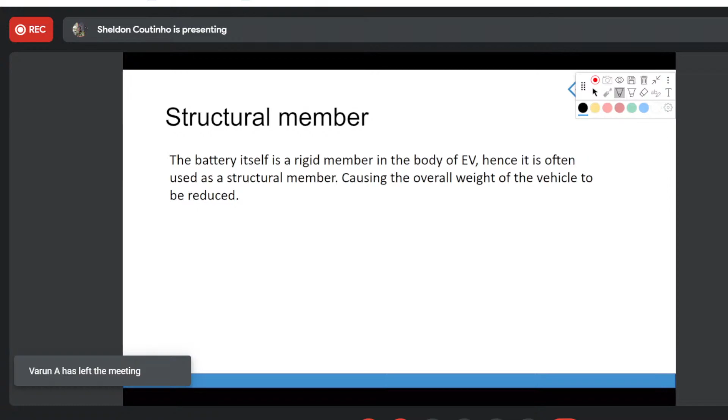So on the right, you have a traditional ladder frame chassis that we see in most modern pickups and tempos. To your left, you see the EV chassis. Now, you can see a lot of cross members running through this typical H-frame or ladder frame type chassis. These cross members are not light components - they are extremely heavy. Total, just the cross members running between the two ladders would weigh around 90 to 100 kilos.

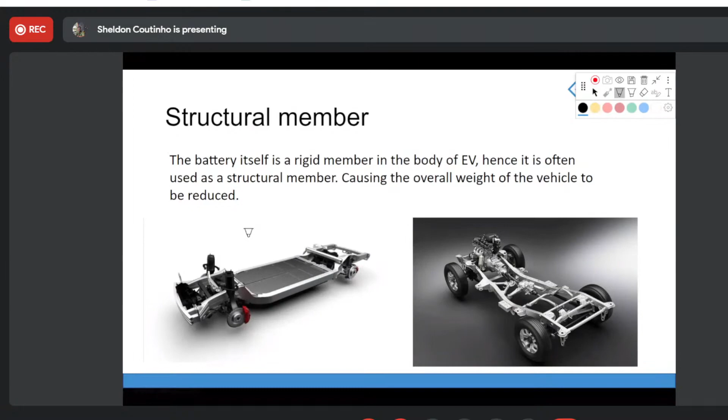However, when you use a battery pack, it can be used as a cross member itself, and it can be used to take the load. So what happens with that? Now, rear wheel drive vehicles, which we have a lot of, generally have a configuration in IC engines called an FR configuration - front engine, rear wheel drive. This is seen in many sports cars and road-going cars, where you have your engine in the front, a drive shaft, then a differential, which sends power to the rear wheels. But an electric motor is completely different.

You can have the battery at one corner of the car and power the extreme end of the car with no issues. You can have a motor running in all four wheels if you want. You can have a motor running in the front two wheels, or a motor running in the rear two wheels.

But with EV, we have this added advantage. If you were to put the battery in the floor of the vehicle and add the motors to the rear, the front of the vehicle is completely empty. What do you do with the front? As you can see over here, it can be used as a crumple zone.

So what is basically a crumple zone? Now, we all know that a machine needs to keep the human safe, right? So whenever you see a vehicle... the Maruti Baleno got a lot of slack for this in the starting days. In fact, all the Nexa models got a lot of slack for it.

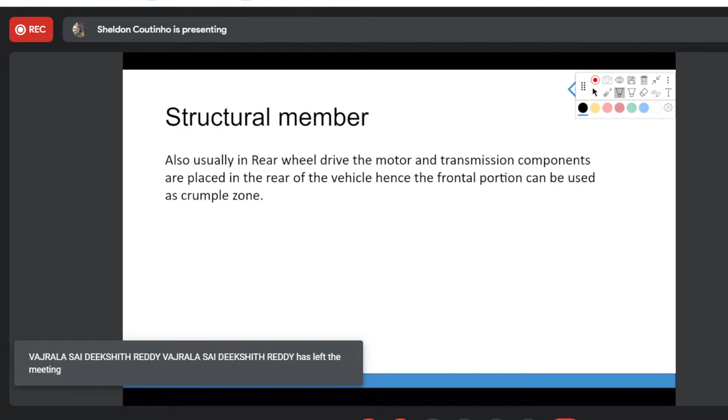For when a small accident would take place where a Baleno would just crash into some normal vehicle, it would get crumpled completely. The entire front would collapse in. And that was where people were confused, because we had never seen vehicles behave like that, where the entire front of the vehicle deforms.

But that is very essential. We want the car to deform and take as much force, as much energy as it can absorb from an accident, and prevent it from entering the cabin.

But now, if you're looking at the traditional combination that we see on Indian roads, the most common, almost 80 to 85% or even higher percentage of vehicles, are an FF combination vehicle, where you have a front engine, front wheel drive. So you have everything in the front - your engine, your gearbox, your differential, your drivetrain, your steering wheel. Everything is mounted in the front.

The rear of the car does not have anything, right? What happens over here is when this car gets into a crash, if it's a very powerful crash where there was a lot of energy, there is only a limited space where you can dissipate this energy. Now I'll just show you a GIF where you'll get a fair understanding of what I'm talking about.

Now, if you see the front part over here, just before the engine, you'll see a good gap where you can see the floor under the car. Now that is there for crumpling.

But what happens when that part of the car has crumpled and moved on, and now it touches the engine? You have a solid block - solid iron or solid aluminum - which is going to take the entire hit. And when you hit a solid, it either cracks or it moves.

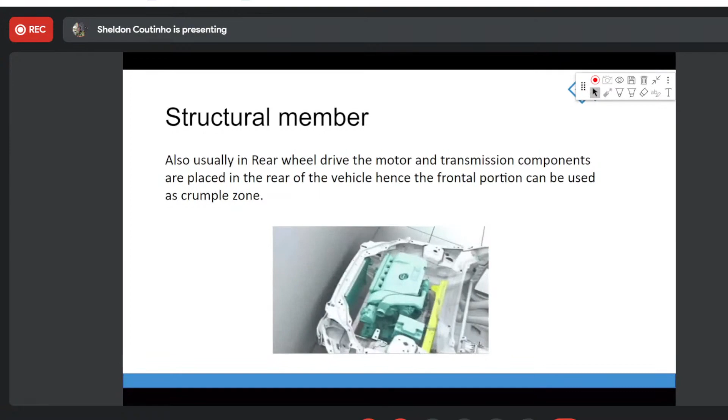So it has happened a lot of times where the heavy engine component got hit real hard, tore through the firewall, and entered the passenger cabin in extreme crashes. And that's a very, very bad scenario to occur if you're in the vehicle, especially if you're the driver or sitting in the co-driver seat.

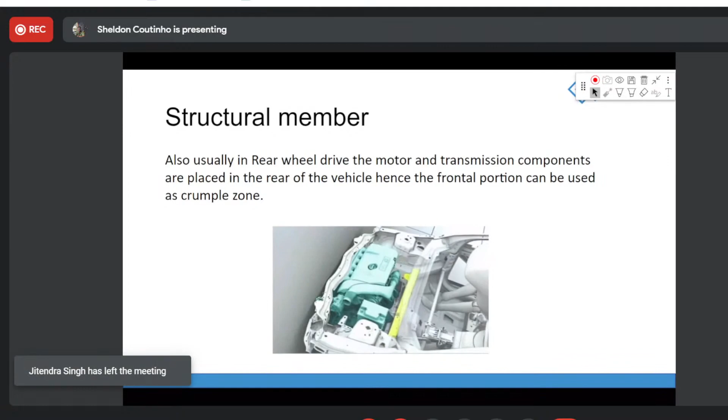So that can all be avoided by using electric vehicles. How can that be done? Over here, consider the battery pack to be in the floor of the car. Your motors and driving assembly, everything is going to be in the rear of the vehicle. Your entire front, you're free to do whatever you want with - you can make it a storage space with a good structural design out there, to absorb any amount of force.

If you've seen the internal panel of a hood, whoever has access to vehicles, go and open the hood of your vehicle. You will get to see, mostly there'll be a heat retardant insulation in there. But if you press your hand against it, you will feel there are cutouts in the hood. So your hood is made out of two panels - an outer panel and an inner panel.

The inner panel of a hood itself tries to dissipate all of the energy coming in straight, diverting it towards the hinges, because the hinges are rigid members. They will rip apart and dissipate the energy. Same with the body of your vehicle - the monocoque of your vehicle will try and take as much of the impact as it can.

But in EVs, we can make that even more effective, where your vehicle tries and takes 95 to 98% of the impact, and you barely feel it inside the cabin. So it ends up making your vehicle much more safer.

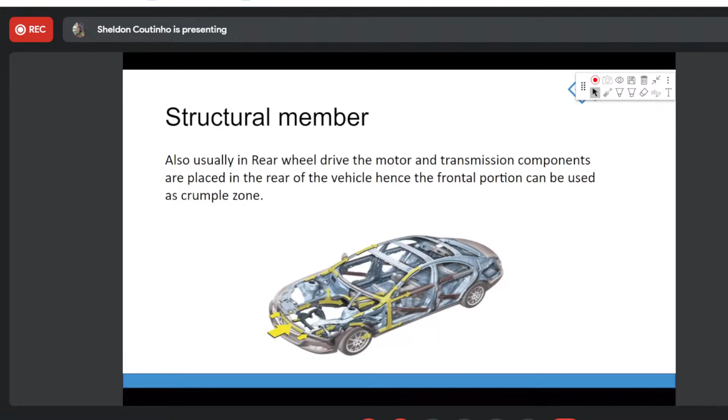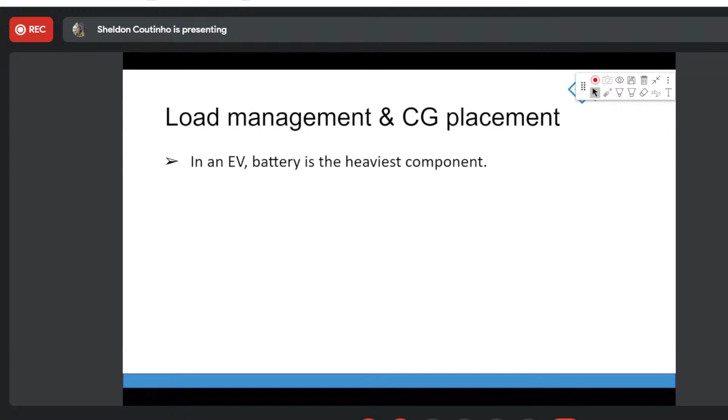So how this test is performed and why it's performed: there was a lot of problems with moose, the animal. It's a huge animal. If you've seen cows and buffaloes, multiply that by 1.5. It's massive and extremely aggressive. It attacks anything that it sees moving. So when people were driving through forests, these moose would just jump onto the road and try to attack the vehicle head on, or just jump and scare the driver. So people have to deflect it, take a quick left and a quick right, or whatever way, to deflect it.

So in a moose test, a vehicle is taken at different speeds - 60 miles per hour, 80 miles per hour, 95 miles per hour - and at different speeds they rate the vehicle on how stable it is. Now, this is a Jeep Compass, one of the better performing SUVs. I couldn't put the other videos because they were actually bad - there were many SUVs that just toppled over.

The reason for that is the center of gravity. If the center of gravity is too high, the vehicle becomes extremely unstable. So when you try to take a quick left and a quick right through a chicane, or maybe dodging someone on the road, there's a high chance you'll topple your car. And once your car is toppled and in motion, you're not the driver anymore, you're not the pilot - you go where the car goes, because it's skidding and rolling and doing everything it can to kill you.

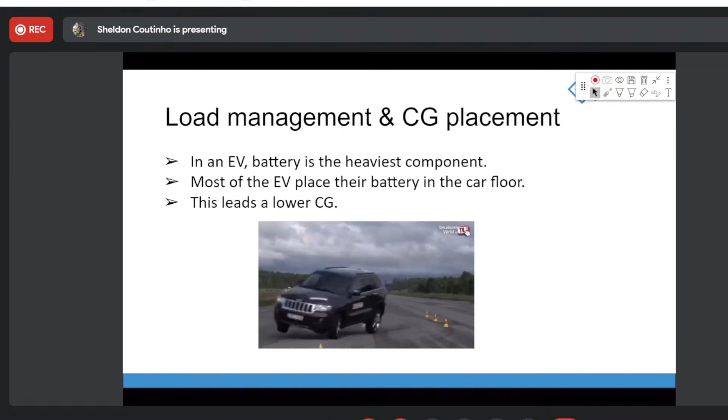That's why EVs and EV SUVs will be much safer, because the overall center of gravity of the car is going to be low. The weight of the battery is going to be so heavy that, placed that low, no matter how many people you load into the vehicle, no matter what the weight of your cabin is, it's not going to outweigh the battery, and this will not be a problem. The car will be much safer at handling something like a moose test.

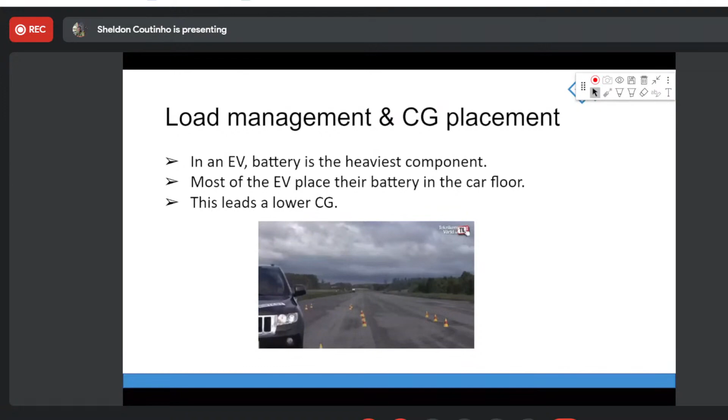Now this is another example, Subaru. Subaru tried to experiment with the Boxer engine. So the Boxer engine is... just give me a second. So the Boxer engine is something like a trademark of BMW and Porsche. No, it's not a rotary engine, it's a Boxer engine - completely different. It's a trademark of Porsche, and of BMW motorcycles.

So what is a Boxer engine? Basically, you have your inline engine where all your pistons are firing in a straight line. Then you have your V engines, where cylinders are firing in a V order - you'd see that on a Harley Davidson, and in cars you'd see it in the Accord, in the Nissan GTRs and things like that, where the pistons are arranged in a V arrangement. But in a Boxer engine, you have it positioned at 180 degrees.

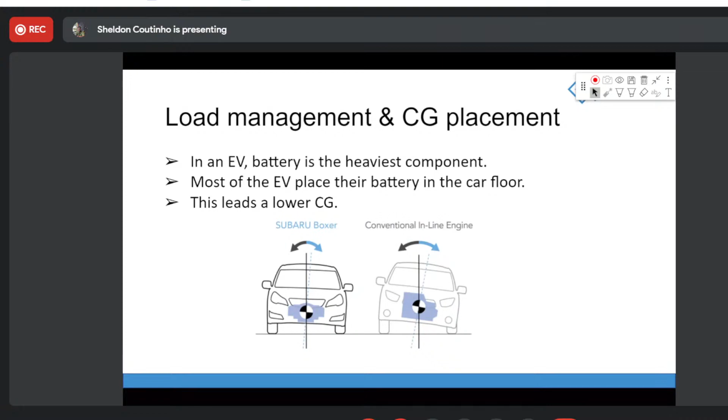That lowers the engine and makes it more like a biscuit - flatter. So what happens when you make an engine flatter is you can reduce the CG of the vehicle. In IC engines, that's the only way you can actually get an engine lower, because there are huge limitations when making a road going vehicle to get an inline six or V6 engine that low, since those engines are much taller. That's where these Boxer engines fared well and did a phenomenal job, bringing Porsche into the sporting picture.

So that's one thing. In EVs, again, if we're looking at the battery pack placed at the bottom of the vehicle, this is an all-wheel drive vehicle, and this car is going to be much more stable than if you had your engine in the front powering just the rear wheels, or maybe a mid-engine all-wheel drive combination, something like the Lamborghini Huracan.

Sir, you are on mute. Hello, sir. Yeah, thanks. Someone decided to mute me for some reason.

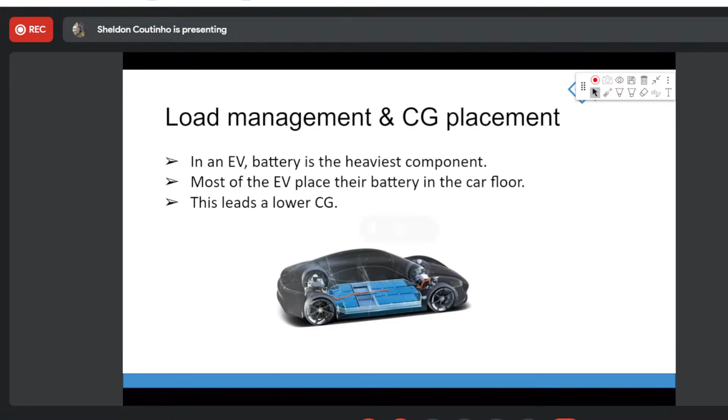If you're going to talk about something like the Lamborghini Huracan, this car has a mid-engine all-wheel drive combination, making it one of the most stable supercars and hypercars that exist. But I could bet you that an arrangement like this, where you have your battery and an all-wheel drive combination, would be much more stable. I'm not going to say it's outright faster, because it's not.

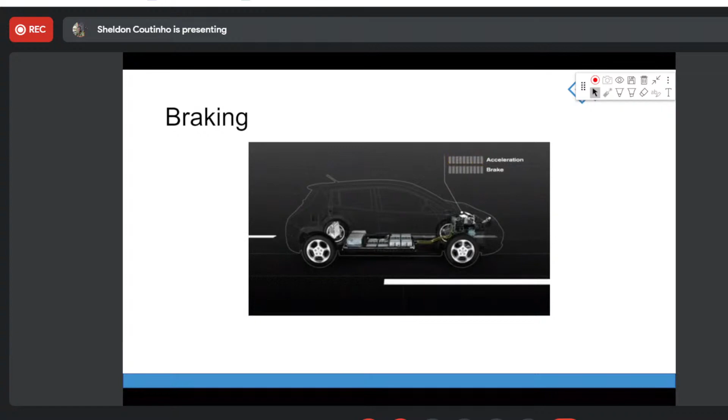If you watch F1 right now, you'd see lights blinking at the back of the car. That tells the driver behind that the driver in front is actually harnessing energy and charging their battery, because F1 car batteries are really small and can't last an entire race. So they use the battery, get aggressive, take some overtakes, and the moment they've taken a lap quickly, they decide to hit the button and harness energy. That's called harnessing or harvesting, and it's very useful in F1.

So next we come to cornering effect and stability.

So this is one of my absolute favorite GIFs. If you've attended any other session of mine, you would have seen this GIF come into play. The basic idea here is this is a classic example of understeer. So what is understeer? Basically, you have your vehicle and your vehicle wants to go straight, and there is... one second, just give me a second.

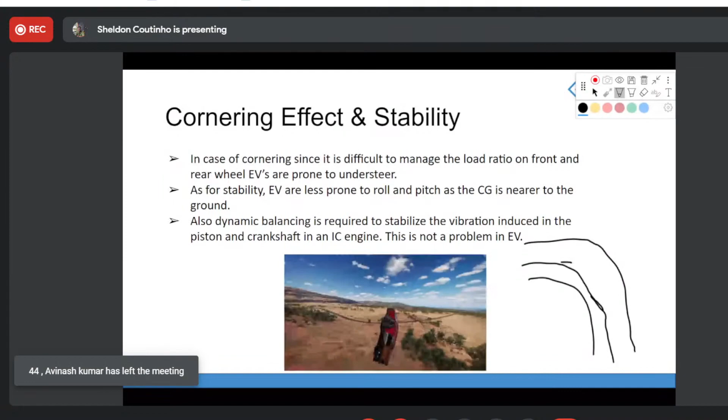You took your car, and the ideal route you want is for your car to follow this path. You want to take a left and continue with its trajectory, like continuing with the road.

But if you are extremely fast, or the weight of your car is too much, you would be susceptible to something called understeer. So what happens in an understeer is when you reach this position, your car won't go left, it would rather decide to go straight and fly off the road.

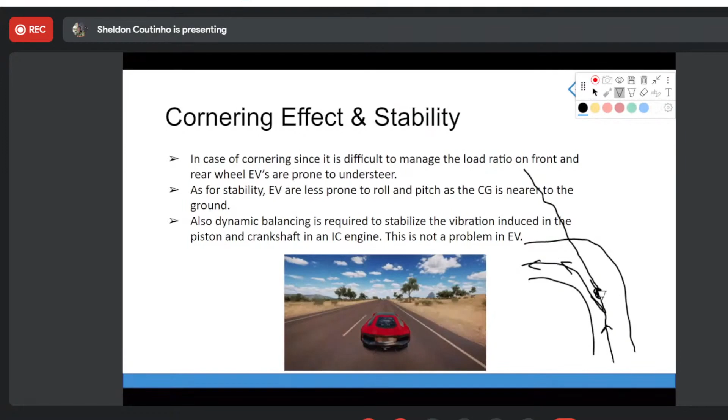The other example would be oversteer. In an oversteer scenario, you again reach the turn, you turn your car in. If the weight at the rear of your car is too much, or the grip on your rear tires is too little, among other reasons, the rear of your car would step out. So as you try to take a turn like this, your car would step out, and you would suddenly point in this direction and go over there.

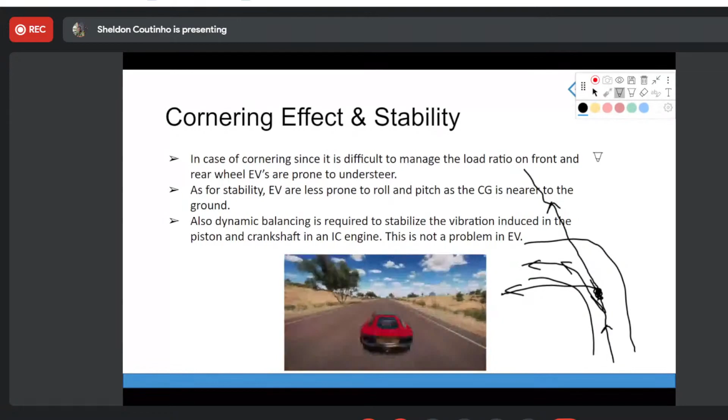Of course, both of these scenarios are not recommended. You do not want any of this to happen. So for that, you have to ensure that your vehicle has got a good amount of stability and can take corners properly. It needs to be wide enough and low enough.

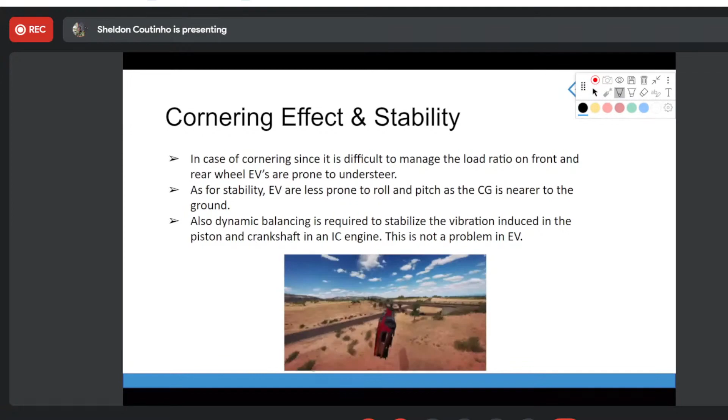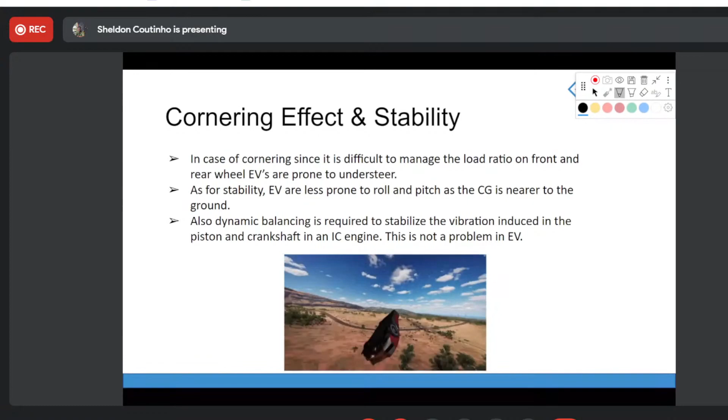So we discussed that we are going to get the battery weight down. The EV is going to be heavy. Now what this does is, since the weight is centralized and low, the overall effect on the CG and the body roll that we talk about in a car is going to be minimal.

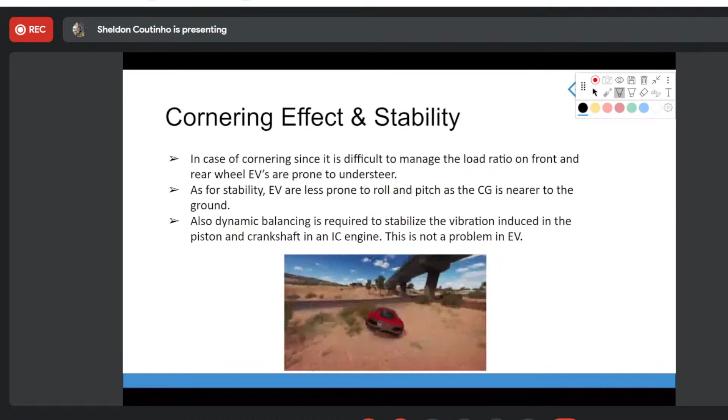So the inertia force, the centrifugal force that is trying to pull you away from the apex - the apex of a turn is the innermost point that you hit in a turn on a racetrack - those forces trying to take you away from the apex can be controlled just by having that amount of weight at the bottom of your vehicle, and that increases stability.

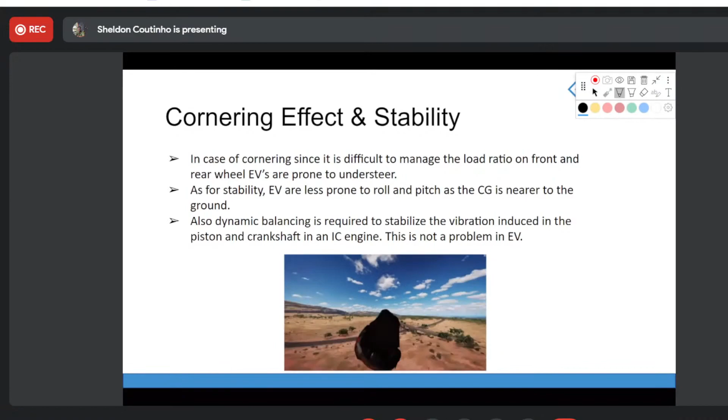Now here we come to a point of view about dynamic balancing. So what is dynamic balancing? Basically, as I told you, you have rotating parts in your IC engine.

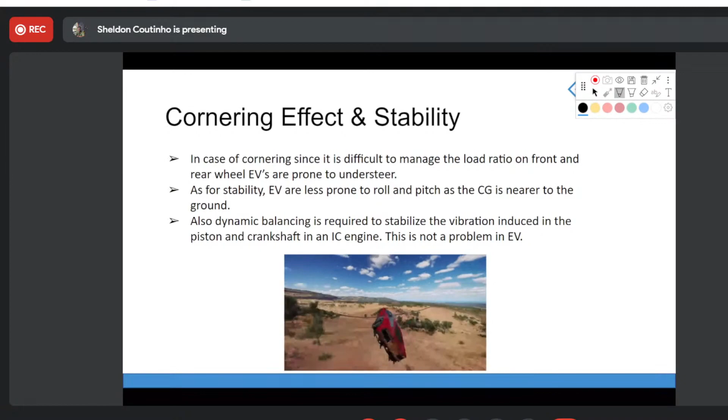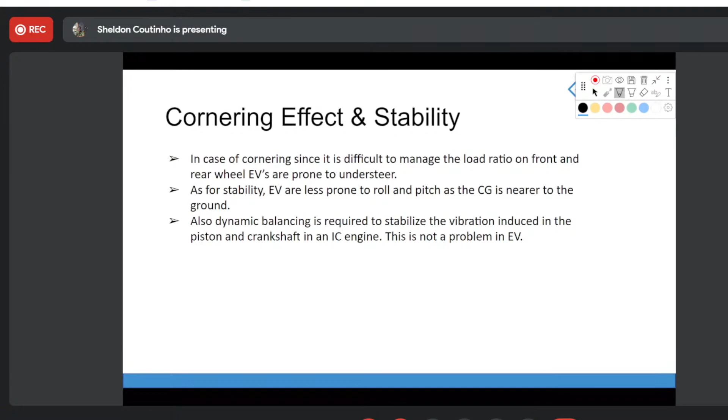So yes, now let's come to the next one, which is noise and vibration.

Okay, someone has sent a question - yes Sandeep, you have a question? Sandeep, raise your hand. Okay, raised for time pass. Okay, so if you do not have any questions, we'll continue.

But we need to take into consideration that the environment matters, and we need it to be in the best of conditions for our own generation to survive, as well as future generations. First we need to think about our own generation, because at the rate we are going, there's a higher possibility that we won't be that comfortable at the end of our lives. So we need to take care of the environment - that's why we switch to EVs.